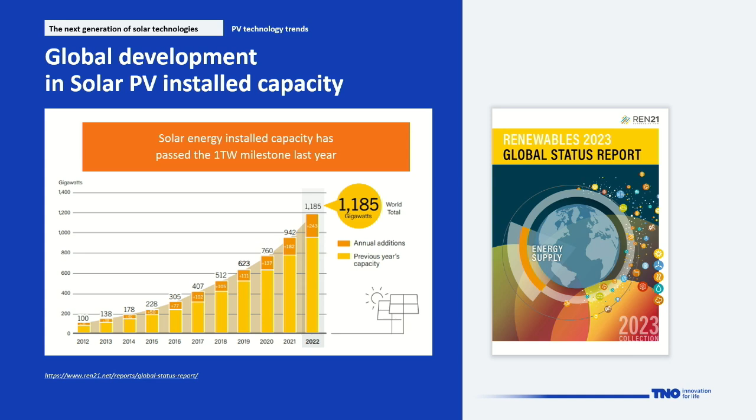If you look at the next generation of solar technologies, it's good to see what is already there. Looking at the global development of solar PV installed capacity in the entire world, that is the amount of solar panels deployed and generating electricity for every one of us. Last year we actually surpassed the first milestone of 1 terawatt peak installed in the world. One of the things that made this possible is technology driven - we have made solar panels better and better over the years.

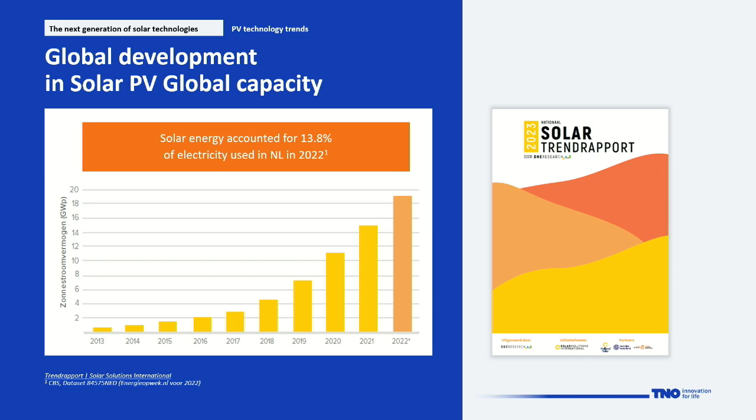If you look at the Netherlands specifically, there's also the same type of trend ongoing. Actually last year, solar energy counted for about 14% of the generic electricity demand in the Netherlands, and you can see these bars are rising as well, which I think is very good news. So the solar capacity is expanding quite a bit, and that is what we need - more renewable energies, and we need to go to a more sustainable future.

One of the reasons that is mainly accountable, where we have all these technology developments pay out, is the price developments. Over the last 45 years, prices for solar panels have dropped an amazing 1,000 times. Technology developments have been very important to realize this, as well as economy of scale, of course.

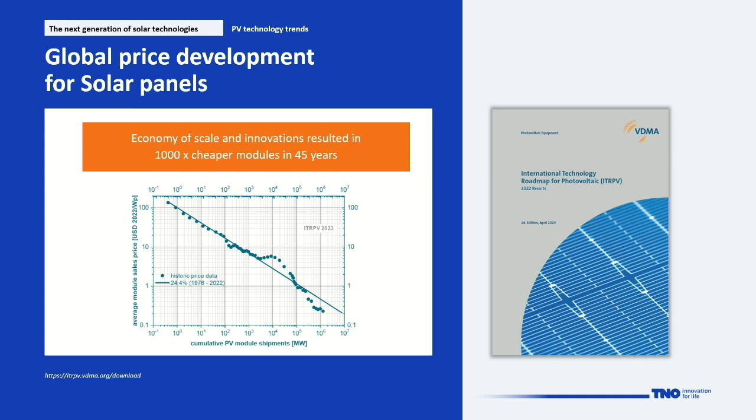Well, this is all made possible with different types of technologies. And if you look at the different commercially available technologies, crystalline silicon with 95% dominates the current market in the world.

These panels have conversion efficiencies of about 20% on average and can go up to about 24%. But the cell thickness of a crystalline silicon cell, due to its nature, needs to be above 100 micrometer, and the standard is about 160 micrometer. And the panels are typically one size fits all, or maybe one size fits almost all, when all the standard fields have been filled.

The other small part of the market are thin film technologies, such as cadmium telluride, which is rather big in the US. There's CIGS, organic PV, amorphous silicon, and perovskite, which just entered the market, and soon to come technologies such as tandem. We will tell you more about that in this webinar as well.

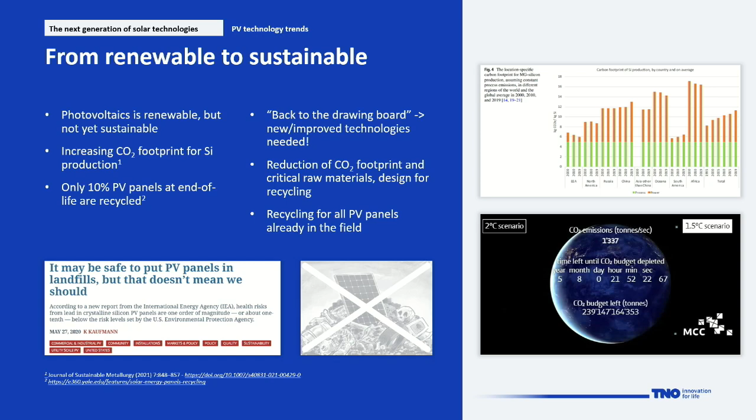On the other side, we also work on technologies we call back to the drawing board, where we put in as little energy as possible to produce these solar technologies. If you look at the chart, there's a minimum amount of energy needed to make crystalline silicon material. And if you look at the timeline, because there's a lot of pressure to produce silicon, the energy needed to produce it is growing instead of getting smaller. That's also an item we definitely need to work on.

At TNO, the main fields we focus on in solar technologies are to increase the energy yield, so increase the efficiencies of solar cells and panels. We want to increase the stability and lifetime of the materials. We want to decrease the cost, because the cheaper PV panels get, the better deployable they are. We look at sustainability, which has become a very important topic, rightfully so. And of course, upscaling of the technology, so what we can do on lab scale also needs to be proven at a larger scale and eventually in the field.

In this webinar, 3 of our topics will be highlighted. The first is design for recycling and circularity, working on the sustainable aspect of solar panels. The next, called the new kid on the block, is flexible solar modules based on perovskites. And the last is tandem architectures to boost power conversion efficiency by combining different materials.

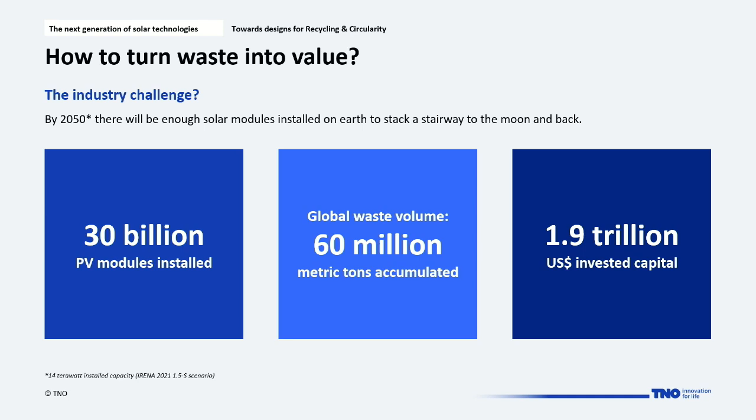This comprises about 30 billion PV modules if you realize a capacity of installed 14 terawatts, and that also will provide us with a global waste volume of 60 million metric tons, equivalent to 10 pyramids of Giza in weight.

14 terawatts will most likely be 30 or even double that, so then you can also double these 60 million metric tons or triple them.

And that brings me to recycling, which is done nowadays by dismantling. The aluminium frame of an existing PV panel is popped off, the junction box is removed, and so is the copper cable, which goes into a separate recycling stream.

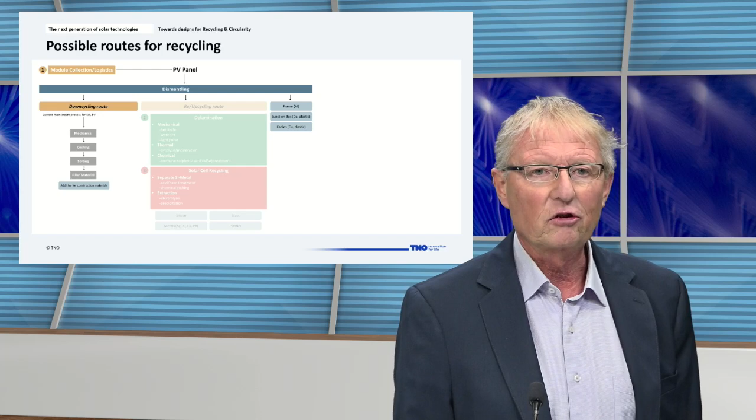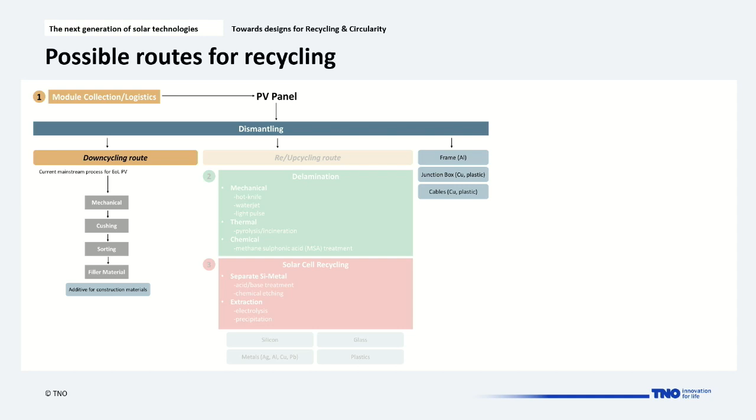The glass plate, the encapsulant, the solar cell, and the backsheet are then crushed and sorted, where the glass is turned into glass cullets used for insulation, and the rest is dumped as filler in concrete or used as grinding material. There is just a better way.

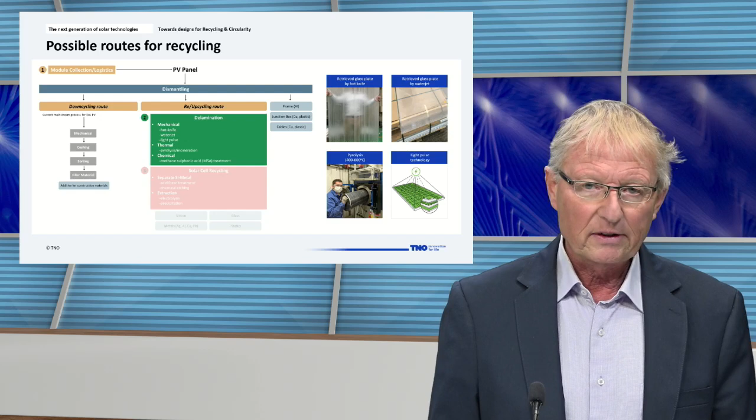So it's not residue-free. There's another technology, a water jet, that could help here and be a bit cleaner. There is also a low energy, high intensity light pulse technology of 1 millisecond at different wavelengths, which acts on the surface of the substrate to delaminate the components layer by layer.

We also can consider CO2, supercritical one, as a cleaning method.

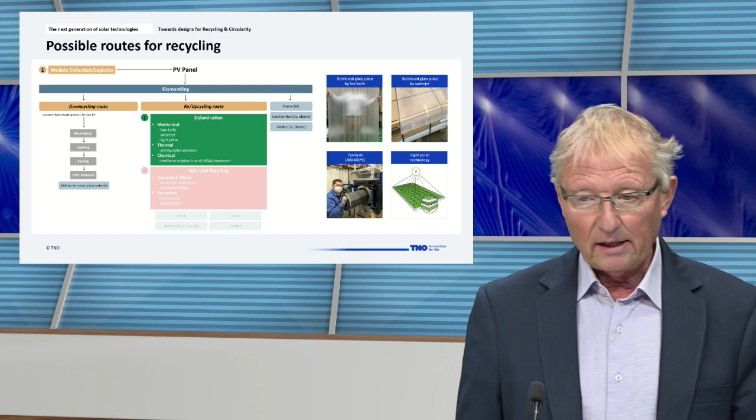That leaves us with the solar cells in an encapsulant matrix and the backsheet, and that can be pyrolyzed at a low temperature of 400 to 600 degrees with exclusion of oxygen, and then we would have the solar cell available. So then we can take off the silver alloy of the contact material by nitric acid.

But there is an environmentally more sound material for regeneration, and that is methane sulfonic acid, or the MSA treatment.

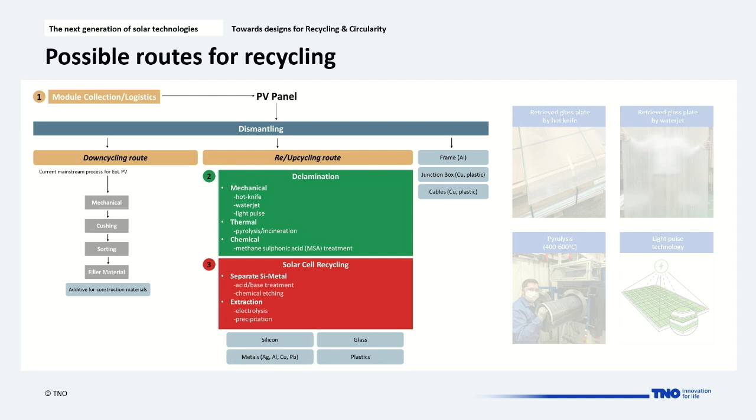If we take a further look at the profits which can be made, looking at dismantling again, the aluminum frame delivers us most of the money. The PV glass plate a bit less, because it still has encapsulant residue on it, and it's recast into window glass rather than turned back into PV glass.

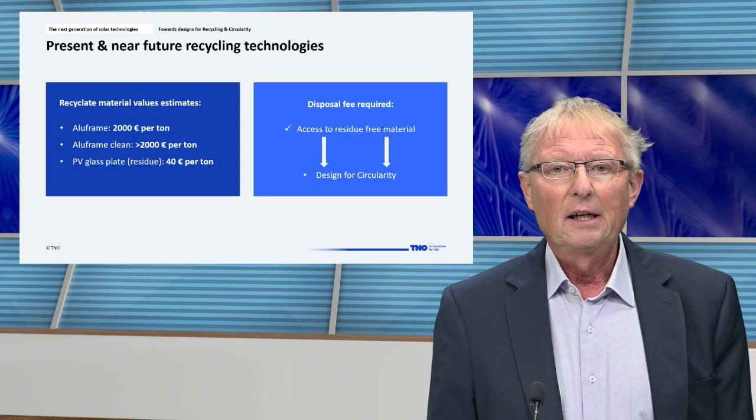So finally, the costs of the recycling are higher than the profits, and this requires a disposal fee. The wish case is to have access to residue-free materials, and that brings me to the next step, and that is design for circularity.

Here are some aspects of design for circularity, as that is not easily adopted at present by the PV industry. The reason is that it's very hard to change any materials due to the high production volumes and the economy of scale. There's also product warranties, so there's little incentive to design for easy disassembly and material separation.

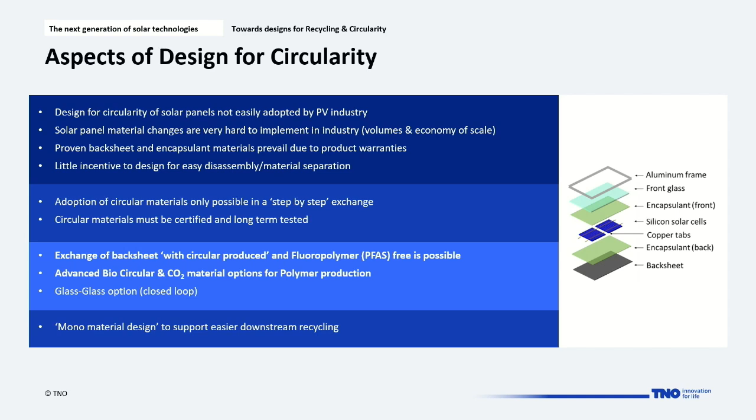If we adopt circular materials, that's only possible, we believe, in a step-by-step exchange. For example, exchanging the standard backsheet with a circular one. And if this material is available, it must be certified and for sure long-term tested.

The good news is there is circular produced backsheet. It's also fluoropolymer free, and it could be made from non-fossil fuel production with advanced biocircular or even CO2 material options for the polymer production.

A more trivial case is the glass-glass option, with a glass front and a glass rear, so there will be no backsheet needed. Glass is in that sense also a closed loop material.

Very important is the monomaterial design to support easier downstream recycling. Here I have an example of such a monomaterial design, in the form of a circular backsheet.

It's a co-extruded polyolefin-based backsheet, which means that all the layers are made from one material, polyolefin. They are modified to fulfill all the requirements of standard backsheets, and there is no adhesive in between the layers.

This monomaterial is of thermoplastic nature, and that helps us a lot to recycle, reuse, and it is also therefore a closed loop material.

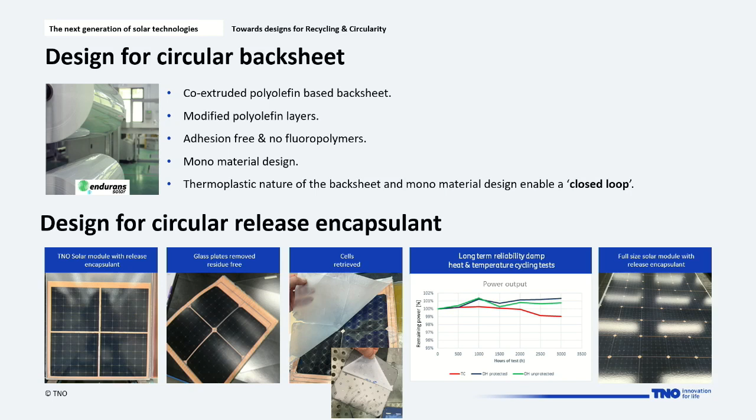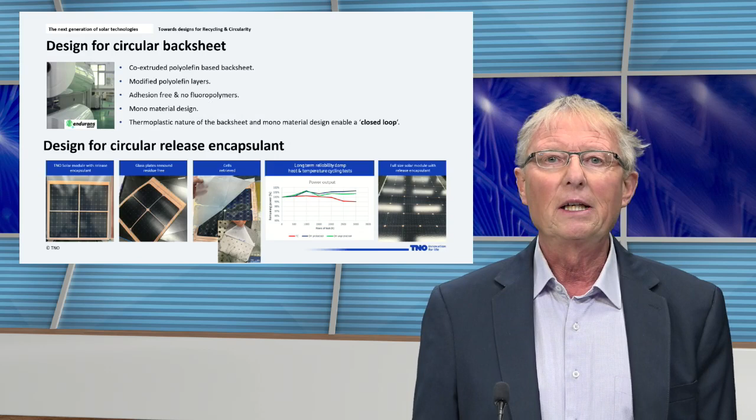These modules have been thoroughly tested for long time reliability following the IEC 61215 protocol, damp heat and temperature cycling. The tests were prolonged 3 times instead of the required 1 time, which is 1,000 hours of damp heat and 200 cycles of temperature cycling. The experiments now go all the way up to full-size 60-cell modules comprising this release encapsulant.

So if we talk about materials which are recyclable and reusable, then we should talk about the olefins. The olefins come in many ways, like the polyolefin encapsulant, which is cross-linked or non-cross-linked, and also as polyolefin backsheet, as we saw just a minute ago.

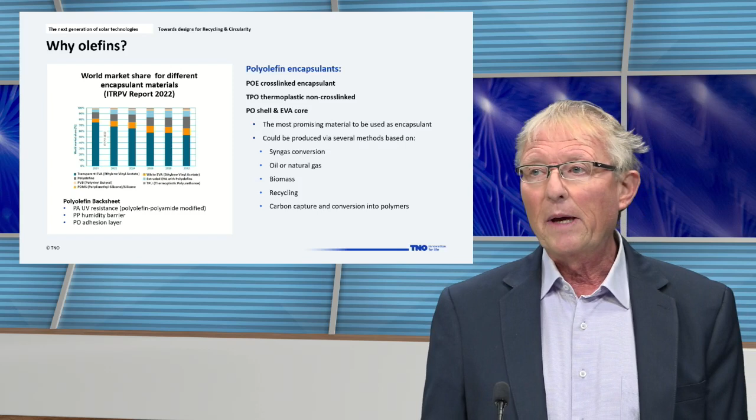Here it's worth noting that the world market for this PV material, the polyolefins, is growing strongly, and they can be made in many forms, like from oil or natural gas, but also from biomass or carbon capture and conversion into polymers, or from recycled polyolefin material.

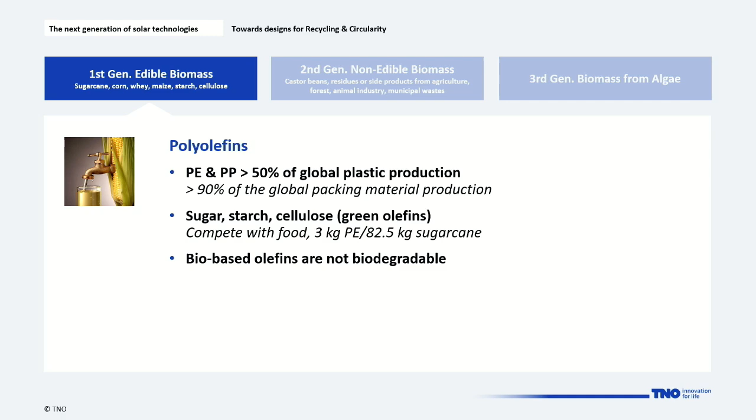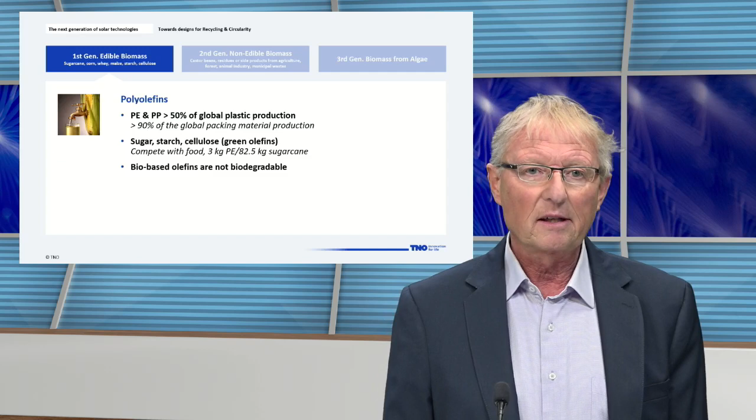If you take a look at advanced biocircular materials, we can make these polyolefins from sugar, starch, celluloses. It's called the green olefin, but it competes with food. 3 kilograms of polyethylene would require 83 kilograms of sugarcane. So that's a no-no, and therefore we better check the second generation, which is non-edible biomass.

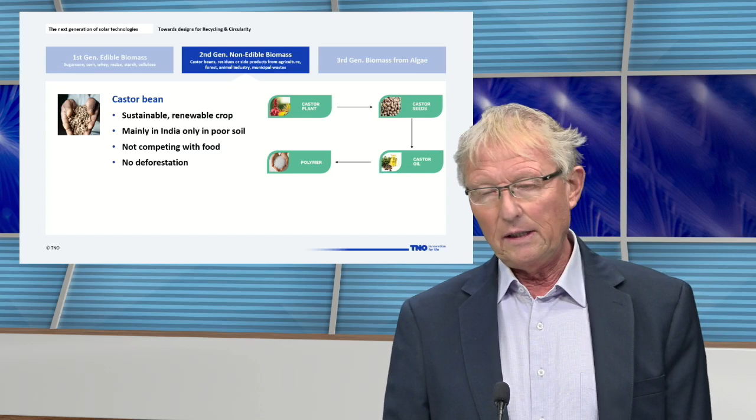There is a very interesting plant, the castor bean. It's a renewable crop, it grows only in poor soil, it doesn't compete with food, and it doesn't cause any deforestation. So we can go all the way from the bean to polyolefin.

Just to finalize, there is a third generation, biomass from algae, also used to produce polyolefin, but it comes at a very high cost, so this is limited to pharmaceutical applications.

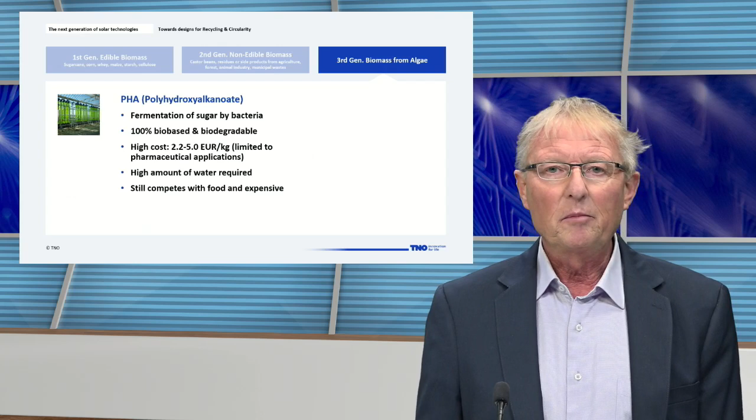If you take a look at the energy balance and the efficiency, it might be a better way to use carbon capture, stored and carbon capture utilized CO2, as a chemical feedstock for the polymers.

There are 2 major pathways to convert this CO2 into polymers. The first one is electrochemistry. That goes by a catalytic reaction, and the key is ethylene. So it takes this chemical precursor, ethylene or monoethylene glycol, to obtain the polyethylene.

There's a second option, a biological conversion done at ambient temperature and pressure with the help of microbes and bacteria. But if it comes to efficiency, it would be better to choose the first one, the electrochemistry, specifically if it is powered by solar energy.

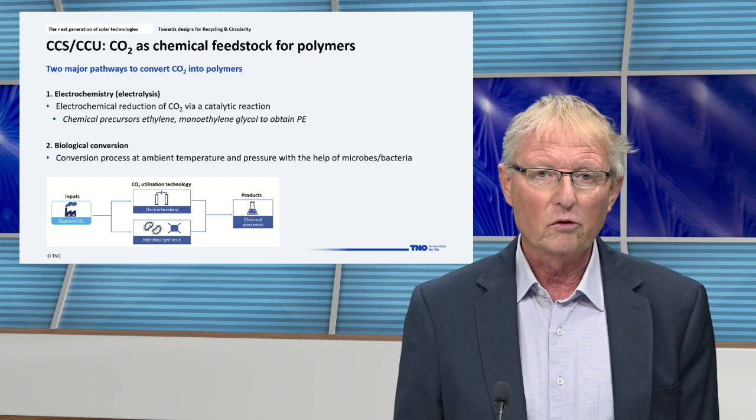Having talked now about the closed-loop materials and the non-fossil fuel-produced materials, I want to switch now to traceability of PV modules at end of life.

More efficient use of raw materials and a more profitable model for the economics of solar panel recyclate requires that the manufacturer of the original solar panels provide a QR code, a digital badge, to all their components in the PV module, and store that data on a digital ledger. That ledger would then allow individual panels to be tracked from creation to circulation.

There is a pilot project already underway, but for PET plastic bottle recycling at BASF. But for sure, the solar community should learn from that exercise and transfer the knowledge towards recycling for solar panels. By the end of the day, the suppliers, the public authorities, the waste collectors, and the retailers, remanufacturing parties and recyclers have access to the information, and the waste collectors can sort solar panels by type and composition.

And finally, the conclusions and the outlook. The PV industry has a strong track record in material reduction and long lifetime, but there will be enormous end-of-life costs for the recycling coming, and that requires novel recycling technologies. So the longevity of PV panels is therefore important to buy us this time for the development of novel recycling technologies, and design for circularity to retrieve the PV module components residue-free and to increase the reuse potential are beneficial.

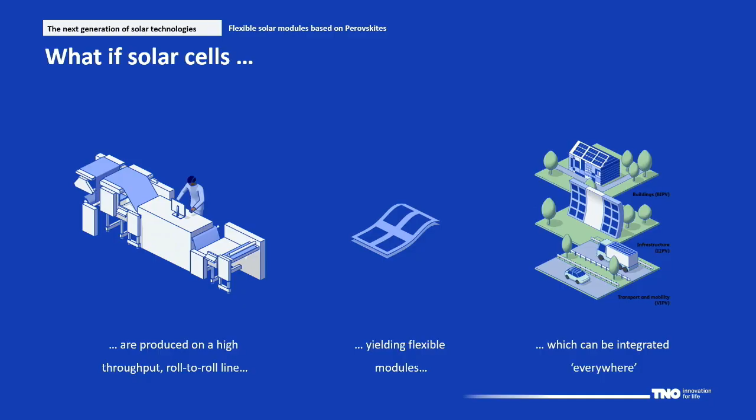Okay, thank you, Veronique. Indeed, let's move to flexible solar modules. As the subtitle is the next generation of solar technologies, we can consider here perovskites. And we can also maybe dream a little bit about how future modules will look. So what if solar cells are produced on a high throughput roll-to-roll line, yielding flexible modules which can be integrated everywhere? Now let's see how we can address this question in the next slides.

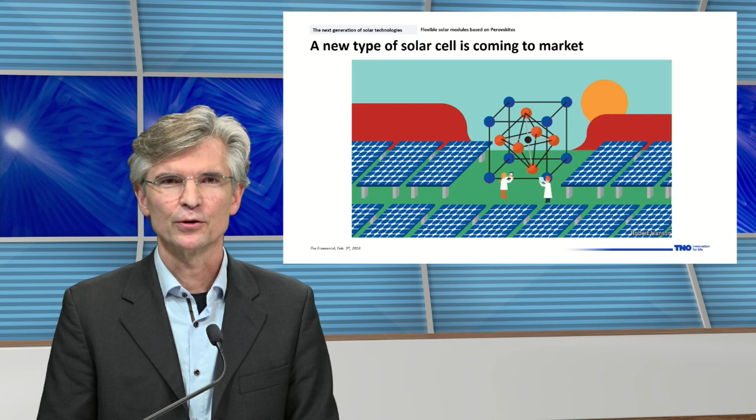So let me see if I can go. Yes, there we go.

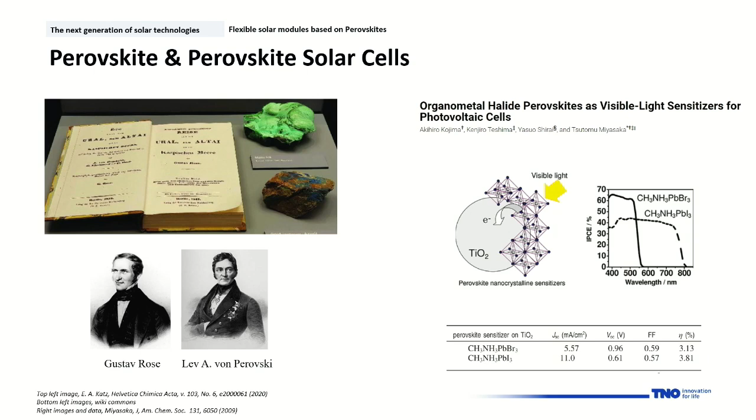That is indicated here in the first paper that was out in 2009. And since then, the field took up this technology, and there has been quite a tremendous race on improving the efficiency, as I will show later.

Now let's have a first look at the crystal structure, the perovskite crystal structure. It's indicated here on the left, and in gray you see the location of halogen atoms, which can be iodine, bromine, or chlorine. Then in purple you see the lead or tin 2+ cation. And in blue, located in the middle, you have a large cation that can be of organic nature, or it could also be an element like cesium.

Now this group of crystals, this group of metal halide perovskites, has certain strengths and also concerns, and I try to describe that in the table on the right hand side. Well, first of all, it's based on abundant and cheap materials, so that's very good for cost and also for sustainability. But there's also a concern because, as indicated, the metal can be lead, and that, of course, should not enter the environment.

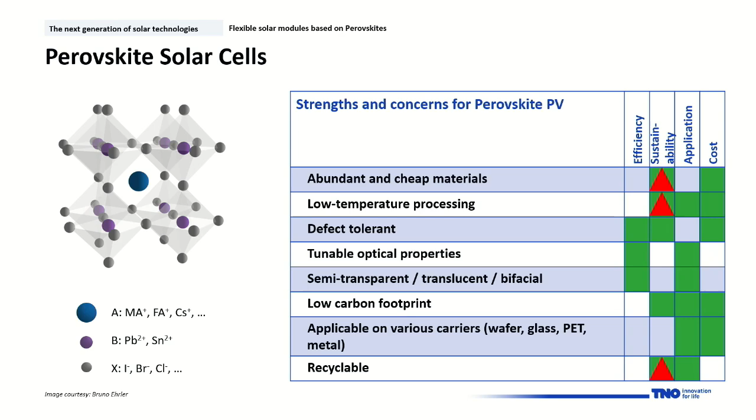Another aspect is low temperature processing. You can make perovskite solar cells with a low thermal budget, and that differentiates from the thermal budget needed for the more mainstream technology like silicon. Low temperature processing means you can make them at low temperature, but possibly the barrier, or let's say the thermal activation barrier to degrade the material, could also be a little bit lower. So that's maybe also a concern.

Other aspects of these type of perovskite materials for solar cells are defect tolerance and tunable optical properties. That is a very important property. If we look to tandem devices in the next presentation, we can make semi-transparent, translucent and bifacial devices, as I will show on the next slide. It also has a low carbon footprint, which is obviously important for renewable energies.

And you can apply the perovskite solar cell on different types of carriers. You can apply them on a silicon wafer, for instance, to make a tandem. You can apply it on glass, on PET foil, and on metal. And finally, the material can be recycled. So you can make a perovskite solar cell, dissolve it, and make again a perovskite solar cell, and these can have very similar efficiencies.

On the other hand, if you can dissolve the perovskite, there's also a risk that during its life in the field, there could be an issue of leaching towards the environment. And this has to be, of course, prevented.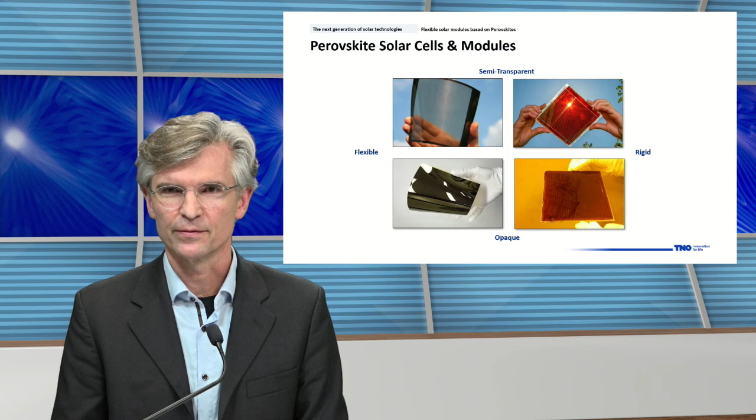Then I go to efficiency, which is on the next slide. Here it shows the power conversion efficiency over time on the left side, for lab scale produced rigid solar cells. You see the efficiency increasing from about 14% to over 26% during the time indicated in the graph. Below that, you see perovskite solar cells made on lab scale on a flexible substrate, and these are also increasing in efficiency and may catch up soon.

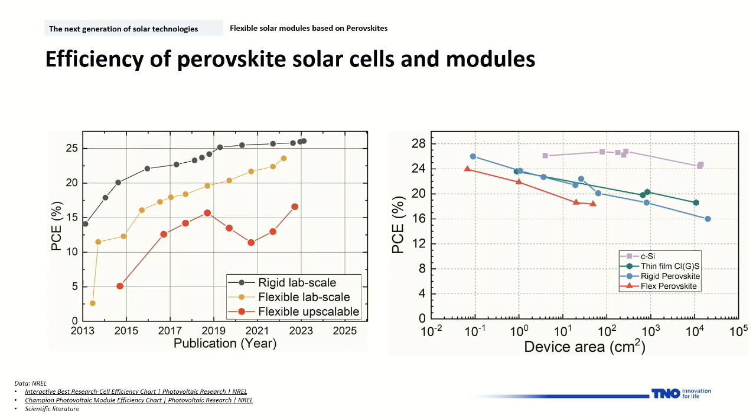Then in red is another constraint added to this type of perovskite solar cell: it's flexible, but also upscalable. You see that the efficiency is increasing, but also sometimes decreasing, probably indicating that there are not that many data available over time.

Then on the right-hand side, you see the power conversion efficiency versus device area of various solar cell technologies. Here you see that for flexible perovskite solar cells, the starting point is at about 24%, but then if we increase the device area, the performance is reduced. Of course, this is a challenge that we would like to take up and make sure that this line becomes more flat, and also to start at a higher efficiency.

That is about scaling up the technology. In this slide, you see our approach towards scaling from lab scale towards sheet-to-sheet and roll-to-roll. On lab scale, we make devices on substrates with an area of about 3 by 3 centimeter, with 4 devices per substrate, and the device active area is approximately 3 by 3 millimeter.

Moving towards sheet-to-sheet processing, we make a similar device structure but on a much larger substrate, about 6 inch. We can make the same type of devices, but also mini modules with an active area of 10 by 10 square centimeter, using scalable techniques like slot die coating as shown in the picture.

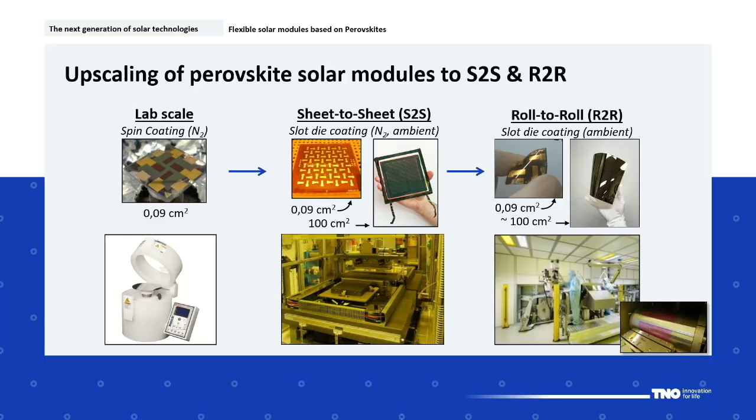The next step is roll-to-roll processing. Again we start with a similar device architecture so we can compare performances across the different length scales and process methods. At the same time, we can also make mini modules of about 10 by 10 square centimeter. For this, we use a pilot roll-to-roll line at TNO.

Now a few words about stability. In 2020, we achieved rigid mini modules which passed 3 critical stress tests. After achieving this result, we published a press release.

We see that other groups are also achieving similar results, which is a fantastic achievement for the whole community. Our ambition is to move this device stack towards flexible substrates.

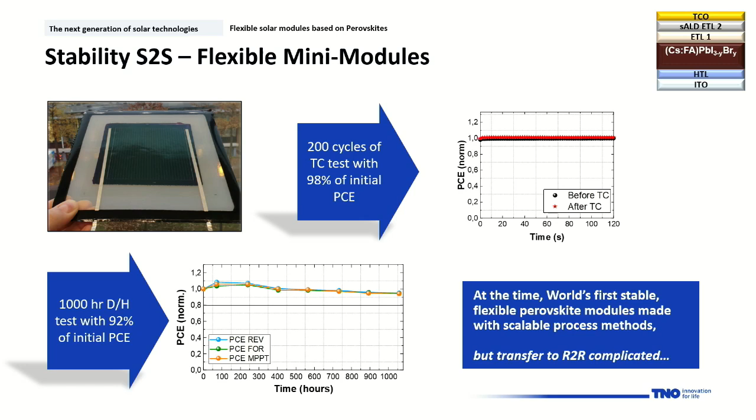So that is shown on the next slide. Here we see the stability on flexible sheet-to-sheet processed mini modules. You see that after 200 cycles, you still obtain 98% of the performance, and after 1,000 hour damp heat, we have 92% of the performance left.

Let me go to the next slide. Here we see that we can obtain this stability also on bifacial devices that have a high bifaciality factor of 97%. They can pass thermal cycling, damp heat test, and achieve a power conversion efficiency of 11%.

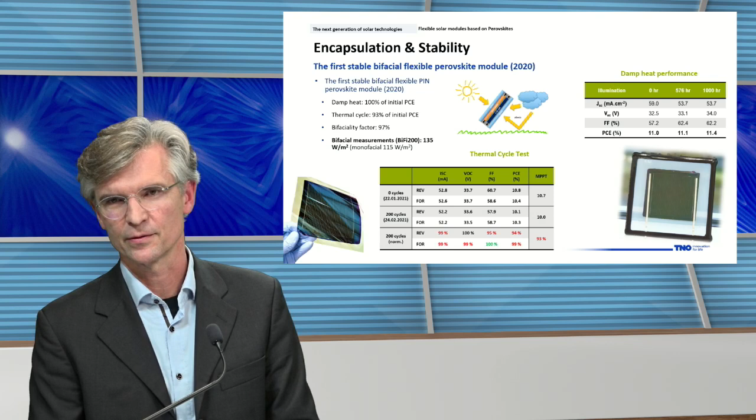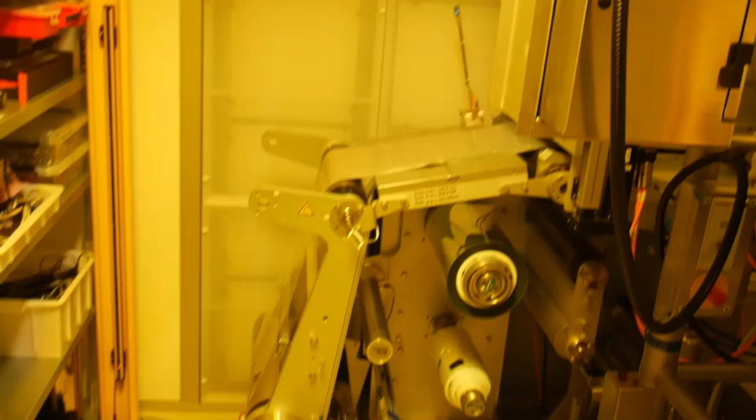Now we can have a look at a video where we process perovskite on a roll-to-roll line. I hope you see the video starting. Here we see the substrate entering the roll-to-roll line.

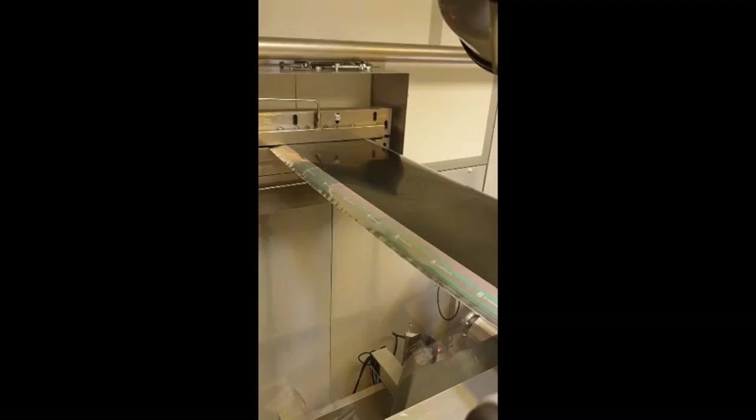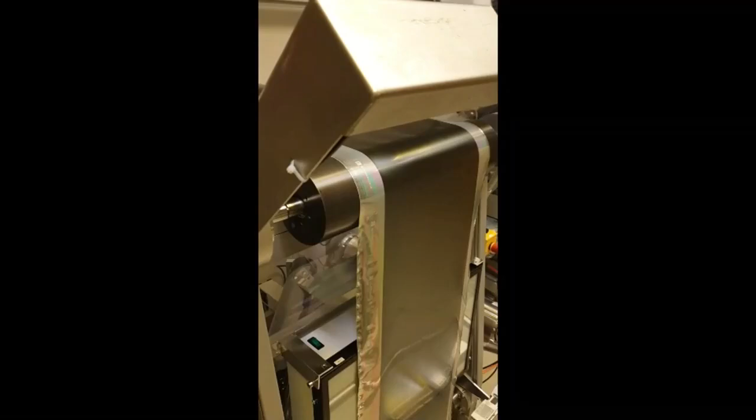The flexible substrate, in this case an aluminum foil, is entering the roll-to-roll line. It passes along the slot die coater shown here, where we deposit an ink with the perovskite precursors, and this enters the oven. When it returns from the oven, the perovskite precursor is actually converted into a perovskite layer. You see this dark, nicely light-absorbing layer coming back from the furnaces, and it is then rewinded in the setup.

We do this together with our industrial partner, HyET Solar. The substrate we use here is also what they use for commercial production of amorphous thin film solar.

Now it's also interesting to look at what else can be done with this technology. You can stack 2 perovskite layers on top of each other and make a perovskite tandem device. This has been done in close collaboration with the Technical University of Eindhoven, where we achieve an efficiency well above 20%.

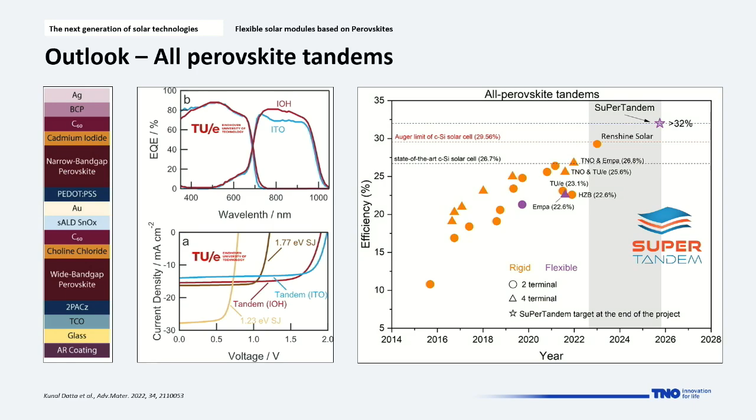That can be pushed further, as indicated on the graph on the right-hand side, where we see that devices have already been obtained with close to 30%. TNO is also looking into this technology in the European project Super Tandem with many partners.

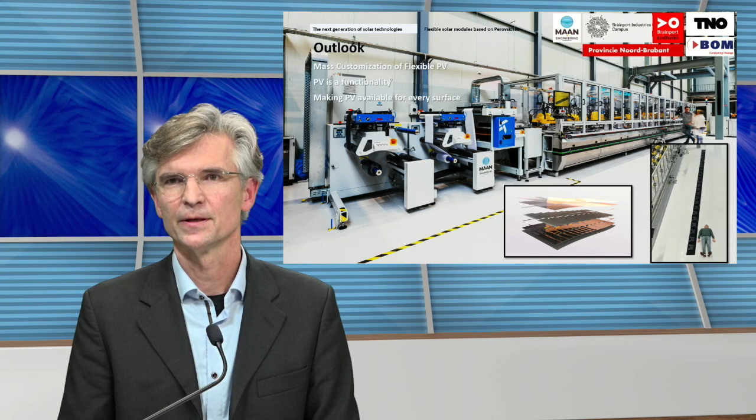Another direction this technology is heading to is being integrated in the mass customization line. This was explained in the previous webinar by my colleague Mark Koetsen. Here we use flexible mini modules and integrate them in a line to make a semi-fabricate that can be integrated on many types of different surfaces for integrated PV technologies.

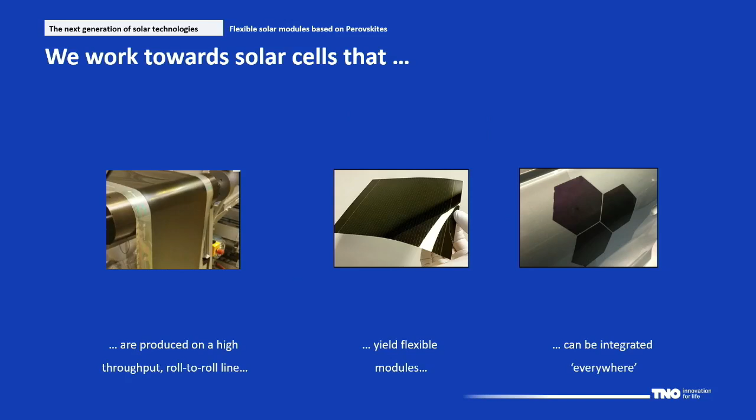With that, I come to the concluding slide. We are working towards solar cells produced on a high throughput roll-to-roll line. They yield flexible modules and they can be integrated everywhere.

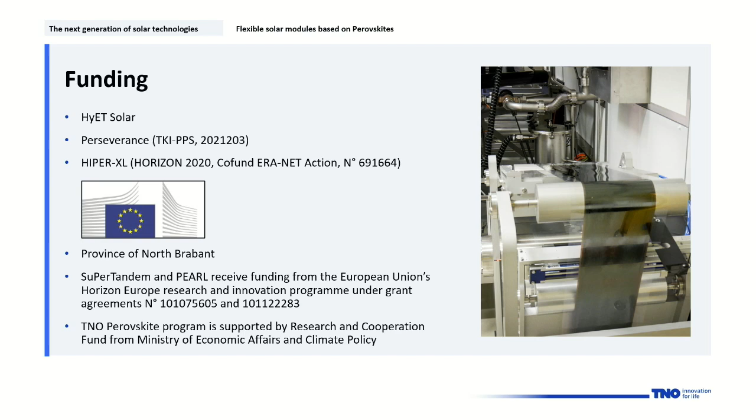Thank you, Sjoerd, for a very nice overview of all the work that has been done and that we are doing at TNO in the field of perovskite PV. There's quite a number of interesting questions, so thank you to the audience. I will choose one now to answer right now.

Veronique, thanks a lot for the introduction, and welcome to everyone online. As mentioned today, I'm going to give you an overview about this tandem concept. I will start my presentation with a bit of introduction, so why we need a tandem technology. I will give you also a little bit of state of the art, so what has been achieved worldwide, mostly on a research level. And then I will jump to the effort that TNO is doing about this topic.

I think there are two sessions: one dedicated to what we call lab-scale tandem architecture - so devices at a very small area - and the last part will be about going towards large area devices that might be more relevant for our industrial partners and industrial companies in general.

Now if we take the best silicon solar cell on the market, in theory we can collect and convert up to 33% of the available power from this spectrum. The rest, this 67%, is lost for different reasons - mainly because part of these photons and energy is not actually collected, and partly because silicon does not convert very well in specific regions, especially in the lower wavelength region.

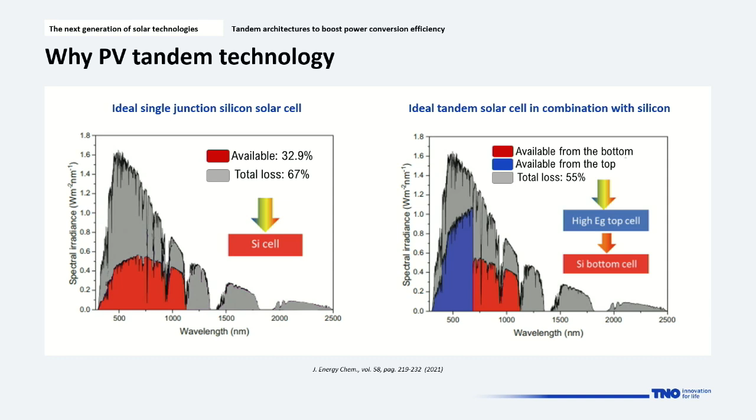With this trick, you can achieve a theoretical efficiency of 45%, and you can massively reduce the total loss. So now the question is, which top cell can we use?

I agree that perovskite can be one of the most promising candidates to do that, and partially the reason has been explained by my colleagues. The perovskite has this characteristic: we can easily tune the stoichiometry of this ABX3 structure by changing a little bit the cation and the halides, for instance, and we can change the absorption edge, so in which part of the spectrum the material will absorb.

The second reason is that when you do this trick, you can still get very high numbers in terms of power conversion efficiency. And this range of what we call band gap is most suited to be complementary with existing commercially available technology like silicon, or other thin film technology like CIGS.

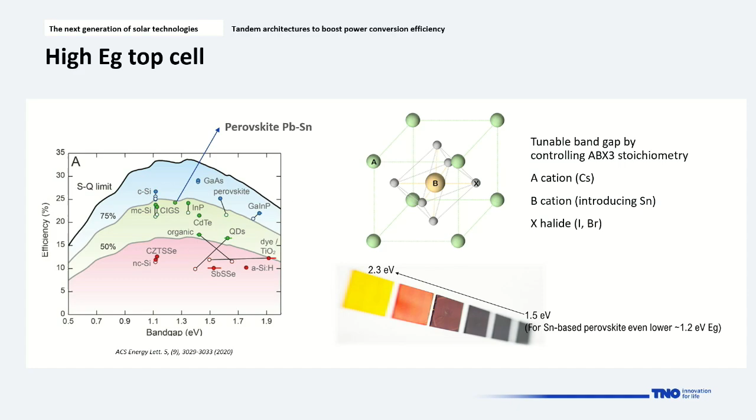So how do you construct the tandem architecture? Worldwide, there are two different structures that people are really focusing on: what we call 4-terminal and 2-terminal architecture. In the case of 4-terminal, you simply stack the top cell on top of the bottom cell. This gives you a lot of freedom in how you make the top cell, and potentially gives you higher energy yield production.

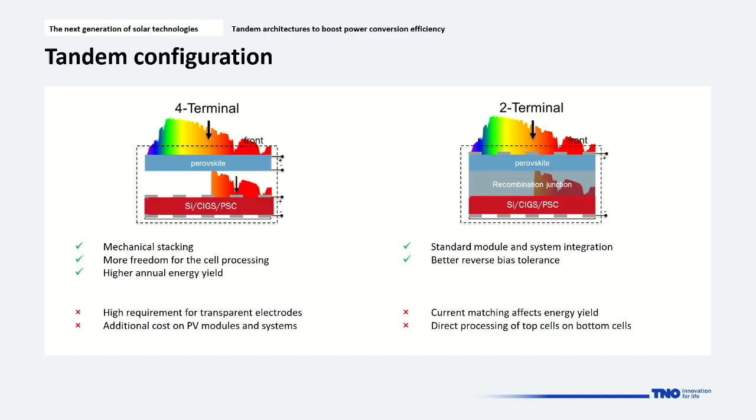The disadvantage is that typically you have more layers that you have to make, so there is a little bit more parasitic absorption that can affect the production of the bottom cell. And on a system level, because these two devices are electrically independent, this means potentially additional cost on your module or system level. On the other side, there is the 2-terminal.

In the case of 2-terminal, what you do is build the top cell directly on top of the bottom cell, and the two cells are connected in series through what we call a recombination junction. Here the advantage is that from a system and module level, potentially you can use the same trick and the same materials that you use for a single junction device. It's also potentially better for reverse bias tolerance.

But the drawback for this type of architecture is that you might have less freedom in how you make your top cell. So for instance, you produce the perovskite on top of the silicon, and because the two cells are connected in series, the same current passes through both of them, so this is fixed. And you might have some reduction, for instance, in energy yield production.

So now if you ask which one is the best, I think this is still debatable, and this is true also if you look at the next slide, showing what has been achieved already worldwide in terms of performance of these different configurations. These graphs are still on a research level, lab scale devices. On the left you have the 4-terminal architecture, and on the right you have the 2-terminal architecture.

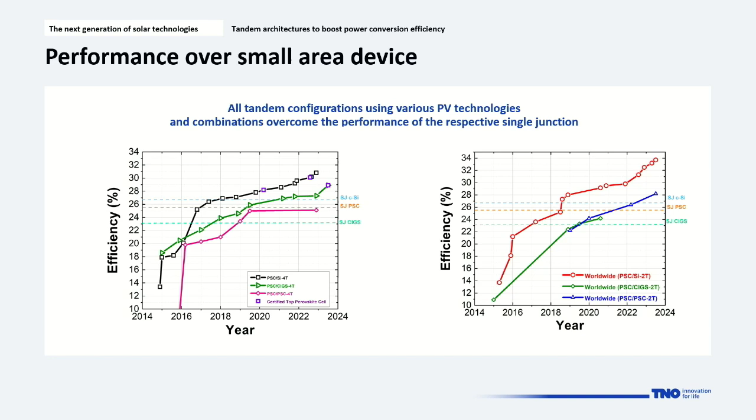The main message here is that all these configurations, when you combine the perovskite with different bottom cells—whether this is silicon, CIGS, or even another perovskite—all of them overcome the performance of the respective single junction devices. This is extremely positive and proof that tandem architecture and technology will definitely be the next step in the PV roadmap and the future of the product.

So let's move to what we actually do at TNO about that. I will start with a few examples of what we can do on lab scale to be more comparable with what is done in literature.

I think you already introduced a few concepts of perovskite, so I don't have to go through that, but one part is extremely important: when we think about tandem architecture, you have to build up your perovskite device to be what we call semi-transparent. Compared to a traditional one, where you can use, for instance, an opaque electrode that can be a metal, you have to replace it.

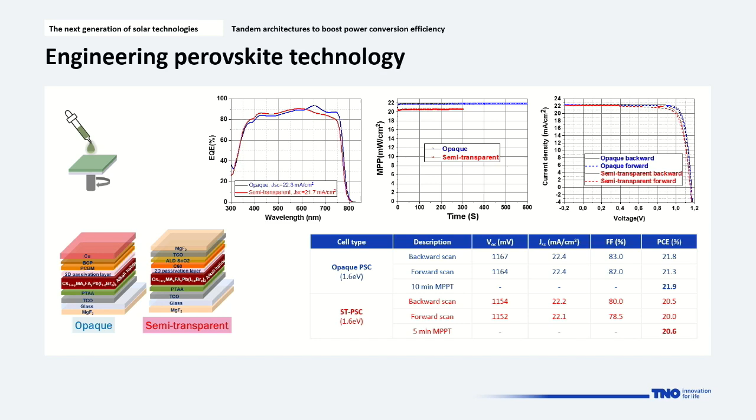Let's say you have to put something that is semi-transparent in order to have that part of the light that is not absorbed by the perovskite pass through and be absorbed by the bottom cell. So what you have to do is engineer this structure to maximize what you can absorb in the visible light, but you also have to maximize what can pass through. This is mostly on the perovskite absorber, but you also have to maximize the transparency of all the other layers. This is a summary of that comparison.

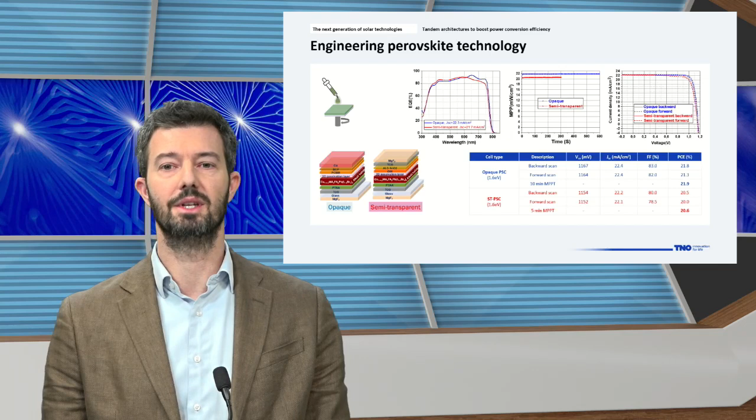For instance, with the opaque device, we can get up to 22%. And when we switch to a semi-transparent device, we get in the range of 21%. This is one of the top-notch results worldwide, and we wanted to be sure that this is very true, so we also sent it to be certified by a third party.

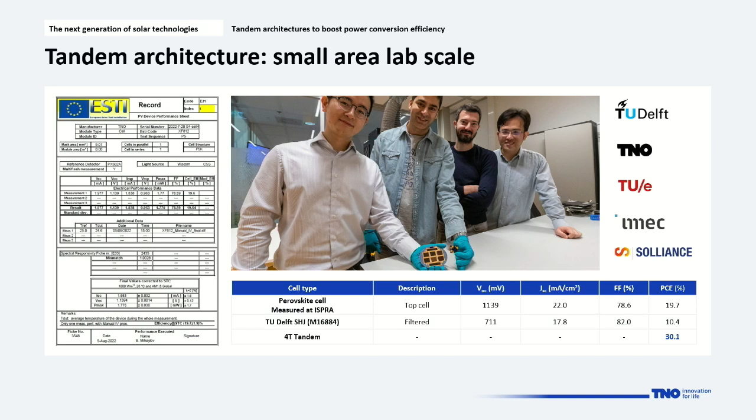With this cell, in the range of 20% after certification, we combine it with a silicon heterojunction provided by our partner TU Delft with an initial efficiency of about 24%. And we calculated a 4-terminal power conversion efficiency of 30%. I think this was the first example of a tandem architecture breaking the milestone of 30%, which is also kind of a psychological barrier for the community.

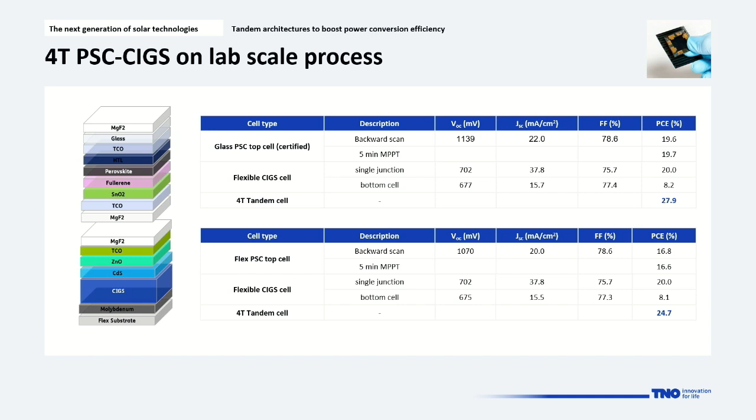This is remarkable, and I think this is the highest efficiency reported up to the last few months. Because we use a flexible CIGS, we try to combine it also with a flexible perovskite top cell, the one that Jude mentioned before. This device was not the last generation, so it's not perfectly optimized, but when combined with the same flexible CIGS at 20%, it can provide a 4-terminal power conversion efficiency of almost 25%. Again, we get a gain of 5% with respect to using just a single junction device.

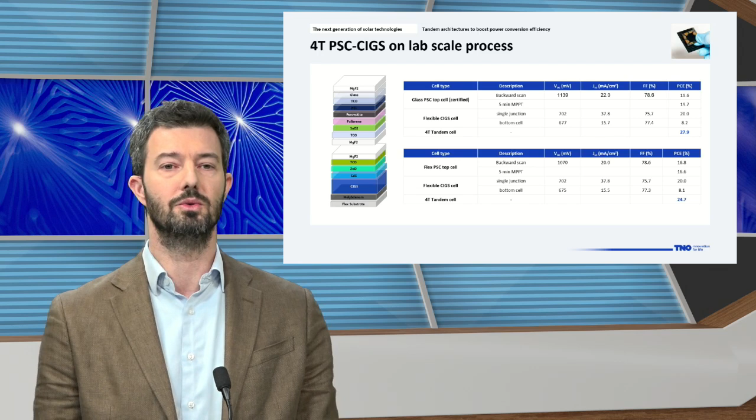We don't limit our research to this 4-terminal architecture. We also build several structures with 2-terminal monolithic interconnection. Here I'll give you an example of what we have done on thin film, specifically CIGS. We use two different types of cells: one that we produce in-house at TNO and something that is commercially available.

In all the combinations that we fabricated, we see a significant improvement of the power conversion efficiency, from 4% with a commercial product to 10% for our in-house devices. What we can claim is that in terms of device performance, we're very much on the same page as the best research groups worldwide. And for the flexible device, I think this is the highest performance ever reported in literature compared to other groups.

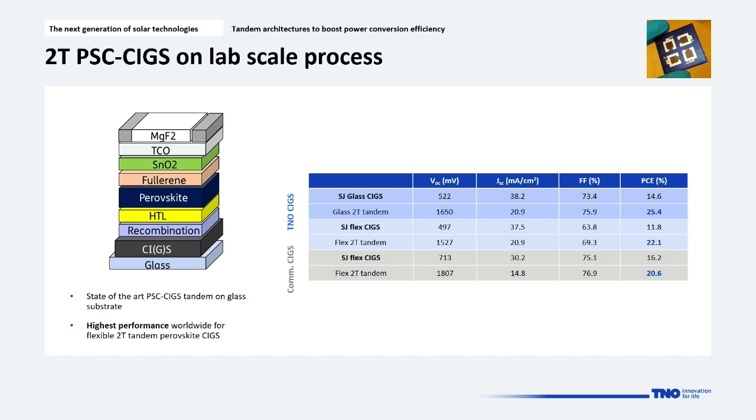Okay, so let's move to the last part, towards large area devices. As I mentioned before, these are very small devices, and one of the missions of TNO is to upscale this technology and prove that it can be transferred to a more relevant environment, an industrial environment, using industrially relevant deposition methods.

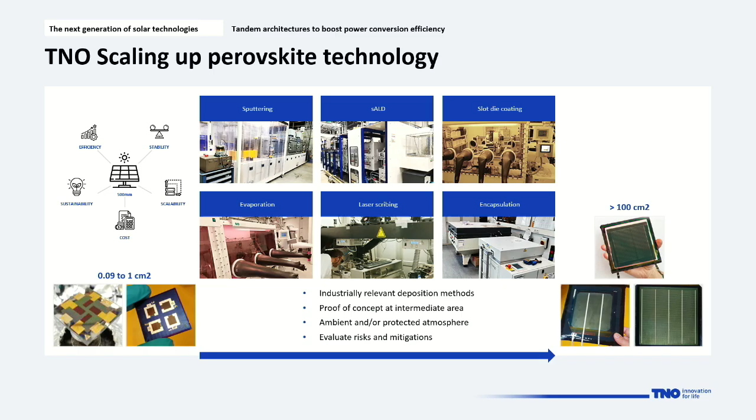Essentially, what you see in this graph is that we want to take the small devices on the left and make large area devices, shown on the right, that are much closer to a final product for an industrial partner. So what we did: we started with a single junction perovskite that is semi-transparent, and we moved from this small scale device with spin coating that we do in our lab to using printing technology like slot die, depositing on glass.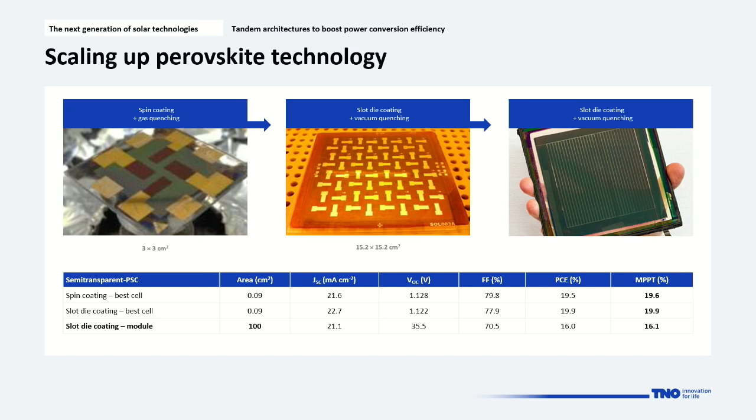The second step, we build up what we call the mini module. On 100 square centimeters, we have this monolithic interconnection of different cells, and we get an efficiency of 16%. For a semi-transparent device, this is one of the highest worldwide.

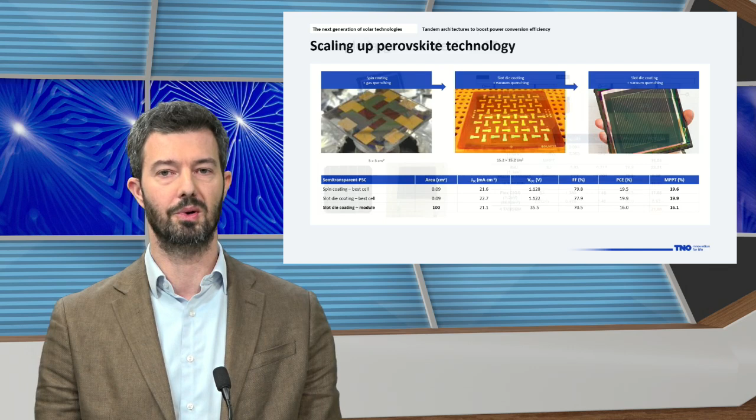The beauty of this specific mini module is that it has been designed for tandem application. All the other layers have been optimized to be as transparent as possible in the infrared region, in order to be coupled with commercial products. This is what we demonstrated here.

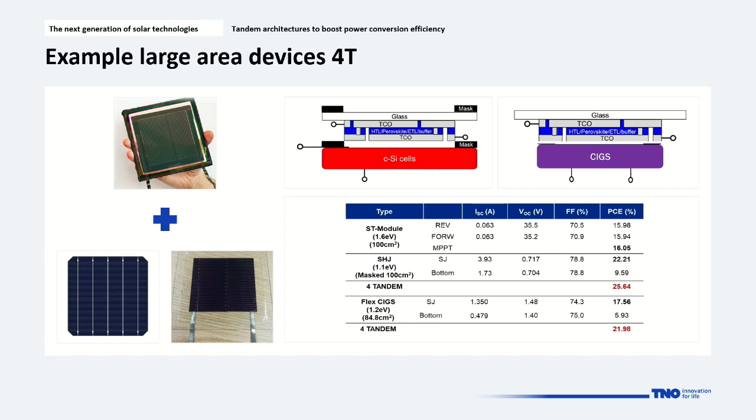We took our module and combined it with a silicon heterojunction with 22%, and we calculated a four-terminal efficiency of 25.6%. So we have an increase of 3-4% with respect to the single junction perovskite. And again, I think this is one of the highest performances at this level of area.

I think if you do the same exercise with another technology, another bottom cell like CIGS, we see the same effect. So from 18% for a single junction, we jump to 22%. Again, we see that the tandem architecture can provide much more energy per square meter.

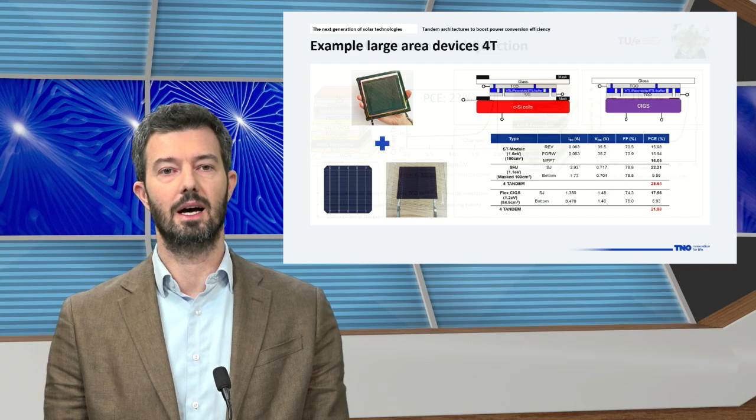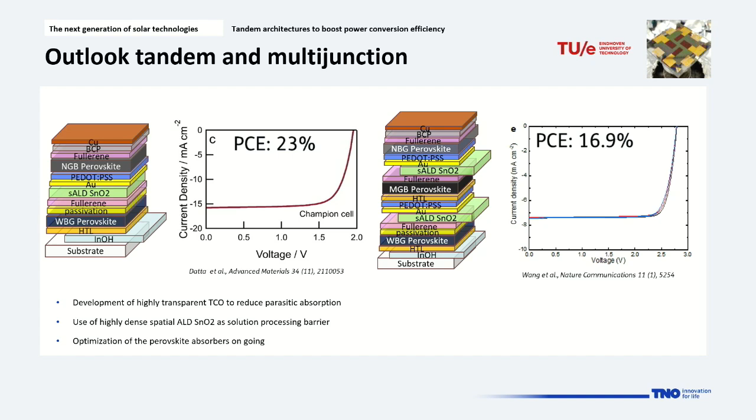In this case, I think we were one of the first in Europe to demonstrate a high-efficiency triple junction device, with an efficiency at that time, about 3 or 4 years ago, of 17%. We achieved this because we can provide very high transparency TCOs and highly dense tin dioxide layers that are really required for this type of technology.

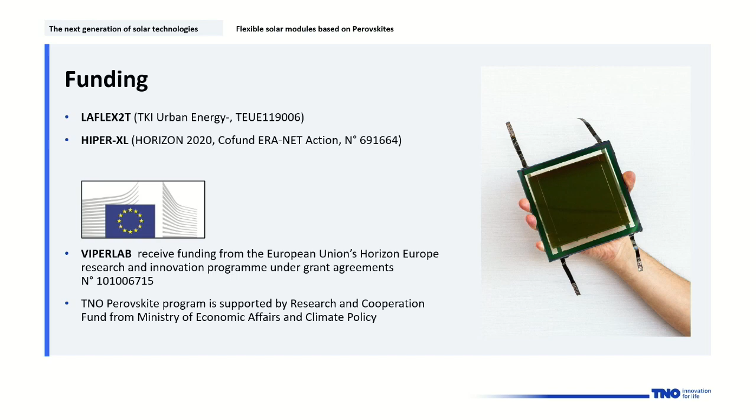Thanks, Valerio, for a nice overview of what we do in the field of tandem technologies, but also what we can expect in the field of tandem technologies. We have some interesting questions from the public. Thank you, a big thank you to the audience for asking your questions. And well, I would like to start with this one.

Valerio, do you believe that a 4-terminal configuration will ever be cost competitive against silicon standalone or 2-terminal tandems? Well, the answer would be yes, I hope so. But I think there are different factors that play into deciding whether or not it will be cost effective. It's mostly, I think, how much energy in the end you can get the device to take out. And if it is cost beneficial, I think you have to see when you start scaling up and look at it from the real manufacturing production phases.

A very similar question from another person is, how soon can we expect these perovskite silicon tandems in the market, commercially available? What's your expectation? We know there are several initiatives in Europe trying to push towards commercialization, so we expect probably next year something from them, maybe end of next year. This is what I would expect. And of course, we have to look at China and see what they're going to do.